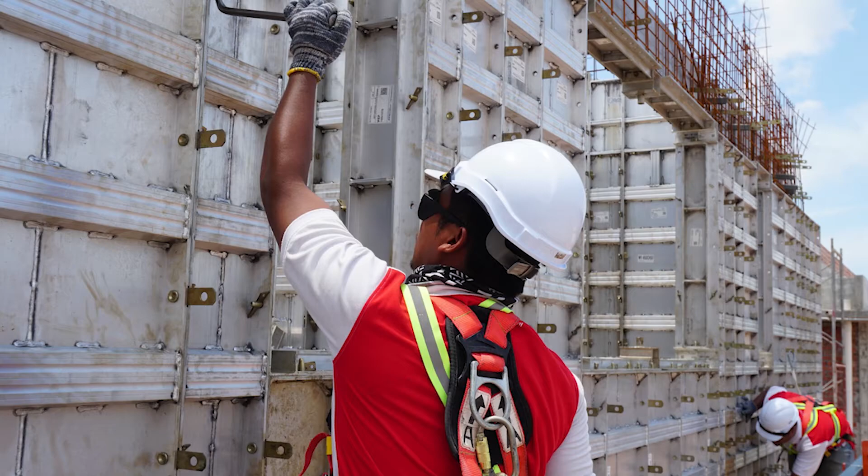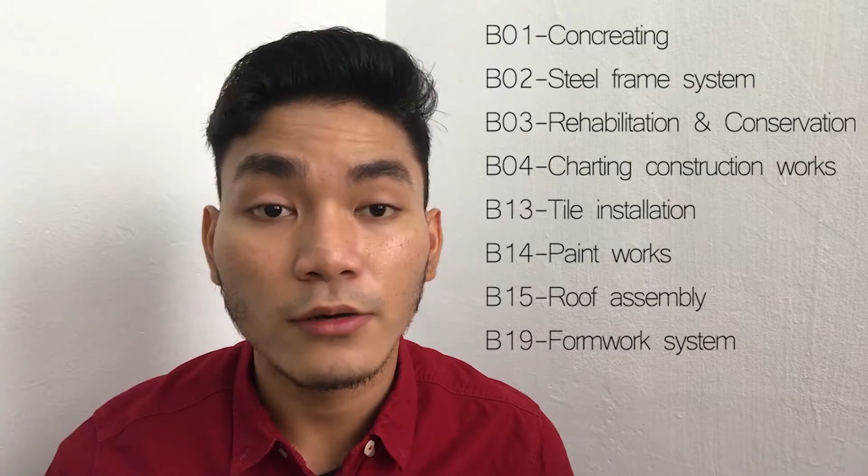Our company is Real Builders in Nurhan Bahad, based in Johor Bahru, allocated at Skudai, Johor. Our company specializes in concreting, steel frame system, carpentry construction work, tile installation, paint work, roof assembly, and formwork system. Our project is at Shah Alam, Selangor, a site location area not familiar to us.

So we shall prepare client requirements such as company registration on CIDB, Suruhanjaya Syarikat Malaysia, ISO certificate, Pusat Khidmat Kontraktor (PKK) Bumiputera status, CIDB procurement grade G7, financial registration, water authority from Syarikat Air Selangor, telecom from Telekom Malaysia, and electricity from Tenaga Nasional, all relevant to authorities' requirements for our site.

This project is in an urban area, the center of the city, so we shall consider getting permission from the local land state, which is Jabatan Bangunan Majlis Perbandaran Selangor, OSC approval to build and enter the site. Also, evaluation of the site was prepared under our insurance, Tokio Marine, and the Fire Safety Division of Malaysia and Fire Rescue Department, as part of our site evaluation form and environmental impact assessment (EIA) requirement.

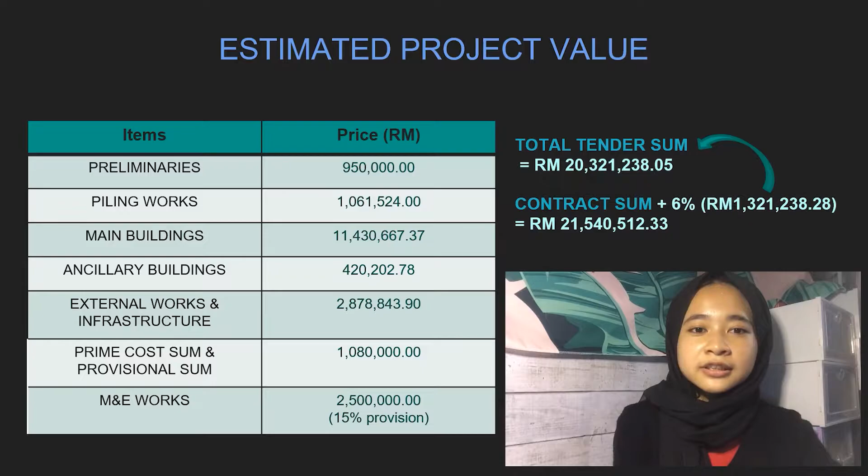Here I am, Nakia. Method statements are very important when it comes to health and safety of projects, particularly in the construction industry. Method statements are documents that detail exactly how to carry out work safely in order to ensure building health and safety.

As for our project, we detail each activity into steps and allocate types of equipment suitable to use during the particular activity, not forgetting the manpower required to carry out those activities.

As an example, for painting activity, our resources for manpower are skilled workers and general workers. The plant or machinery they need to use includes scaffolding, brush, roller, and plastic paint tray. As for the method, they need to apply painting on both external and internal necessary elements such as walls, according to the approved type and color of paint mentioned in the bill of quantity.

They need to make coating twice or more based on the requirement. Lastly, the inspection of the wall by the client or architect to obtain acceptance.

In planning resources allocation details, we make a schedule showing how many labourers and machinery are required to carry out each activity. We refer to websites to obtain information such as labor outputs, productivity rates, and production rates on the works as listed in the bill of quantities.

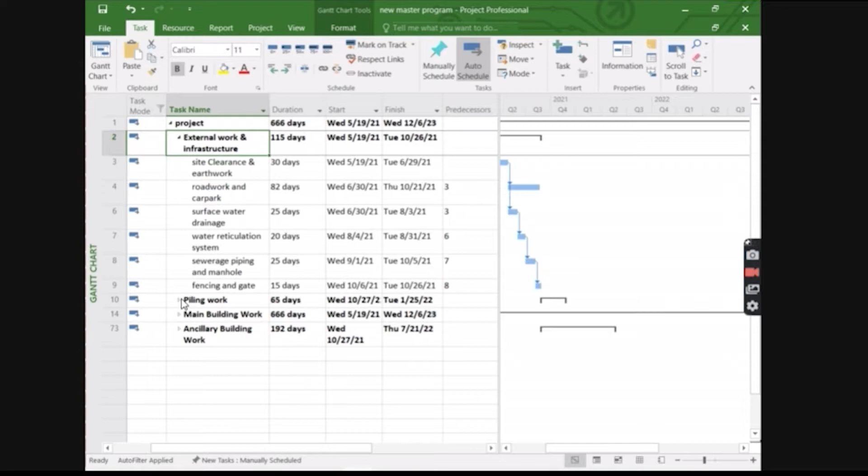In the piling work, there are 3 works that include precast concrete work, hydraulic jack-in pile, and pile testing. This piling work is to be completed in 65 days.

For the next is the main building. This main building is the main item for main work for the construction. So in main building work, WBLF is work below lowest floor. It includes the excavation, reinforcement work, formwork, concrete, waterproofing and soil treatment.

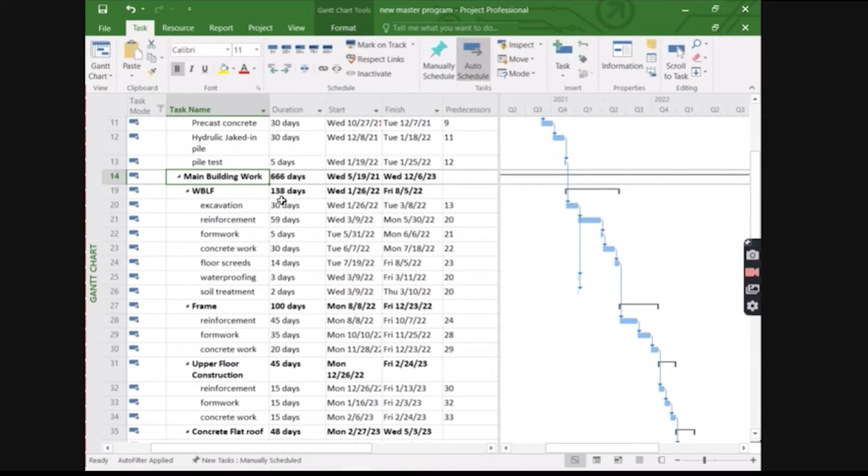So WBLF is 138 days to be complete. For the frame is 100 days to be complete. There are framework, reinforcement work, formwork and concrete work.

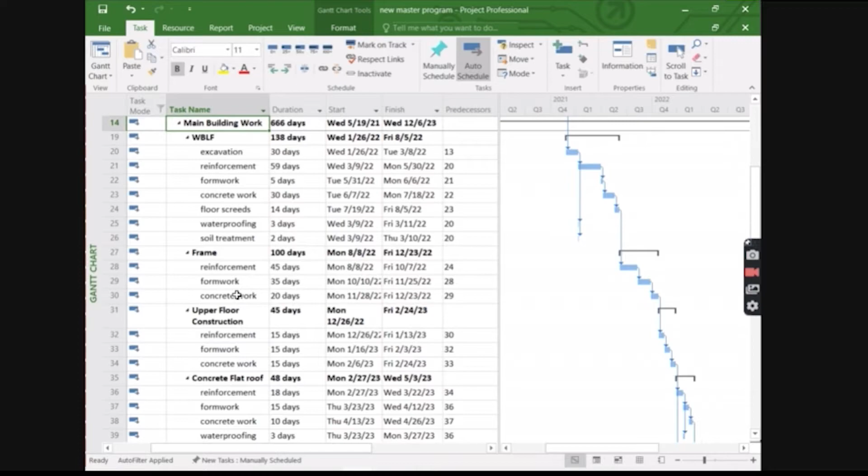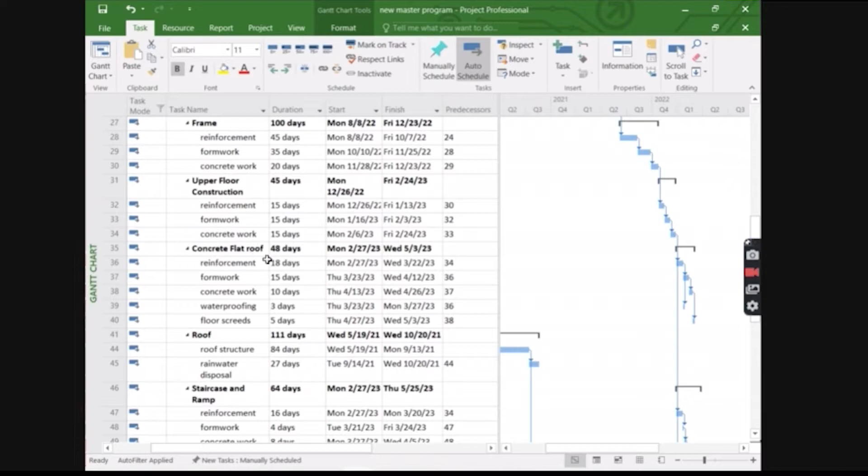So for the upper floor construction, there are 3 items, which are 45 days to be complete. Concrete flat roof is 48 days to be complete. For roof is 111 days to be complete.

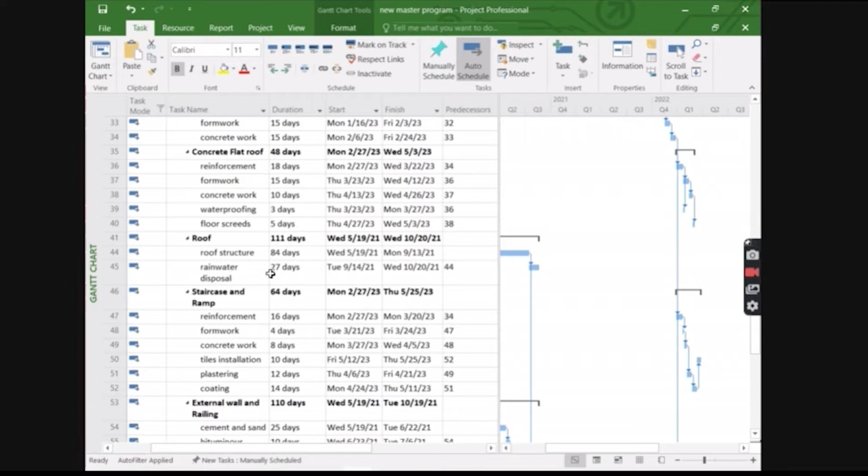This includes the roof structure and rainwater disposal. For the staircase and ramps, it is about 64 days to be complete. This includes plastering work, tiles installation work, concrete work, plaster coating, reinforcement and formwork.

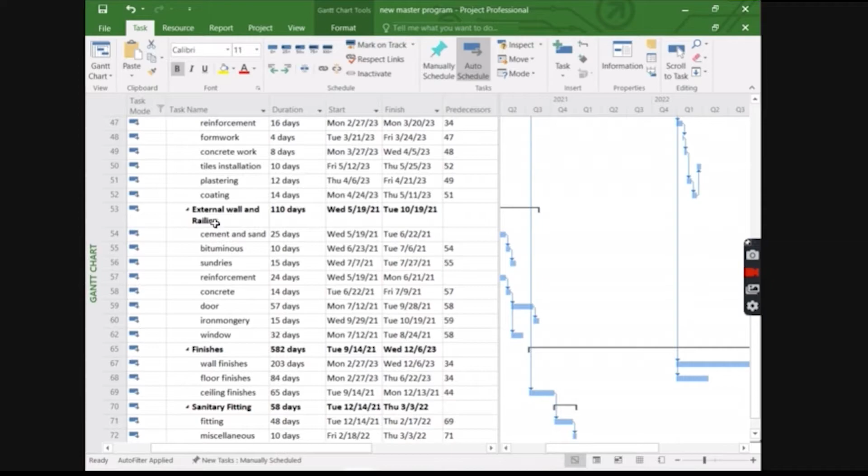For the external work, external wall and railing, this is about 110 days to be complete. The items are cement and sand, bitumens, sundries, reinforcement, concrete, door, ironmongeries and windows.

For the finishes is 582 days to be complete. This includes the wall finishes, floor finishes and ceiling finishes. Okay, so the sanitary fittings is 58 days to be complete.

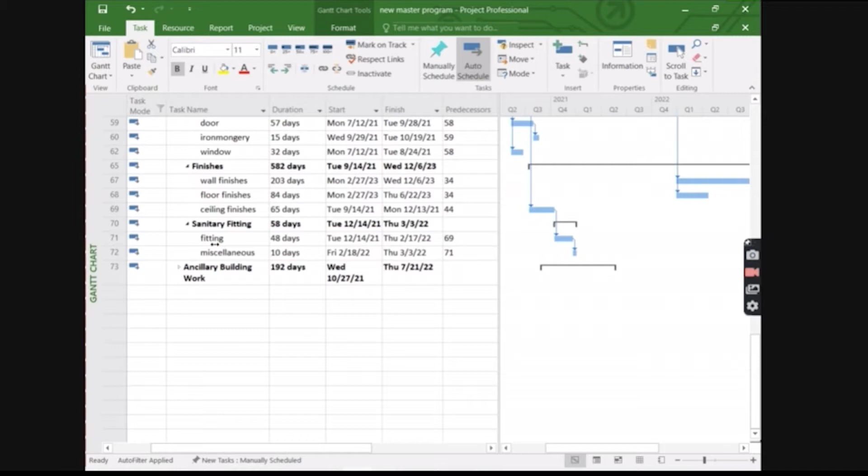Okay, and last is the ancillary work. So the ancillary work has 4 items to construct: refuse chamber, guard house, TNB substation, and wakaf. The refuse chamber is about 150 days to be complete. It includes external brick wall, door, windows, sanitary fittings, frame, roof, and work below floor level for the concrete work, reinforcement, etc.

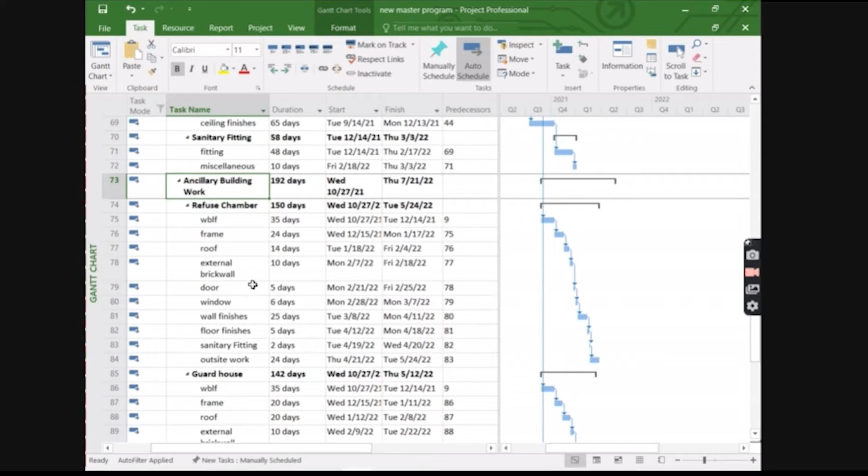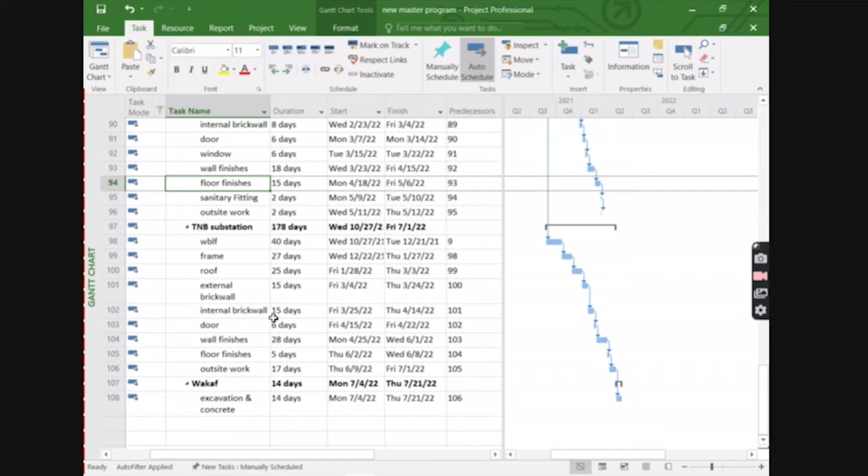For the guard house, it is 142 days. This includes the overall item to be complete in 142 days. For the TNB substation it is about 178 days to be complete. This includes the floor finishes, wall finishes, door, internal brick wall, external brick wall, frames, and roof.

And for the last is the wakaf. It is an item of excavation and concrete work for the wakaf, in 14 days to be complete.

Hi, my name is Fadisola binti Salet and I'll be explaining the part of risk assessment.

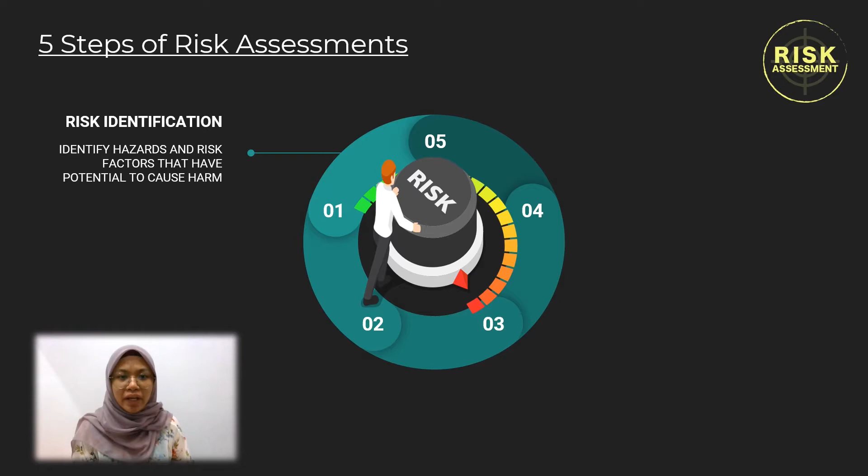There are 5 steps of risk assessment. First is risk identification, which is identifying hazard and risk factors that have potential to cause harm. Second, risk determination, which is to identify the person or property who might be affected by the risk. The third is risk analysis, to analyze the risk probability, severity, and risk level according to the risk matrix. The fourth is risk response, which is evaluating suitable response to be taken upon the risk. And the fifth is risk control, which is to determine the appropriate solution to eliminate or control the risk.

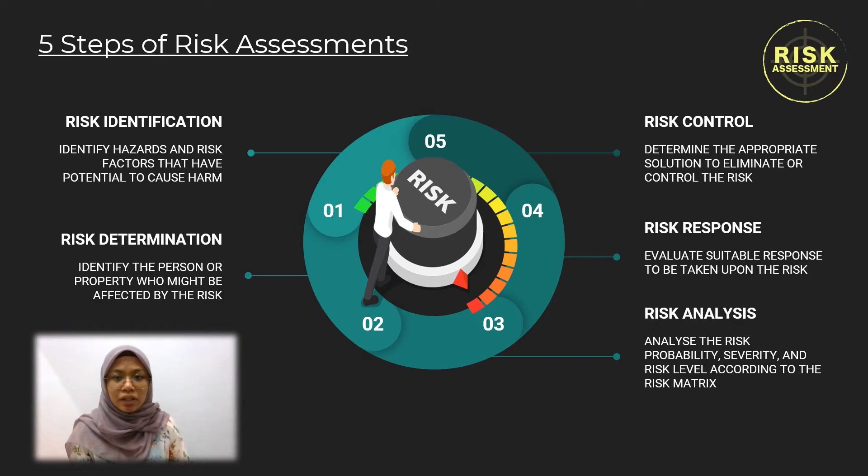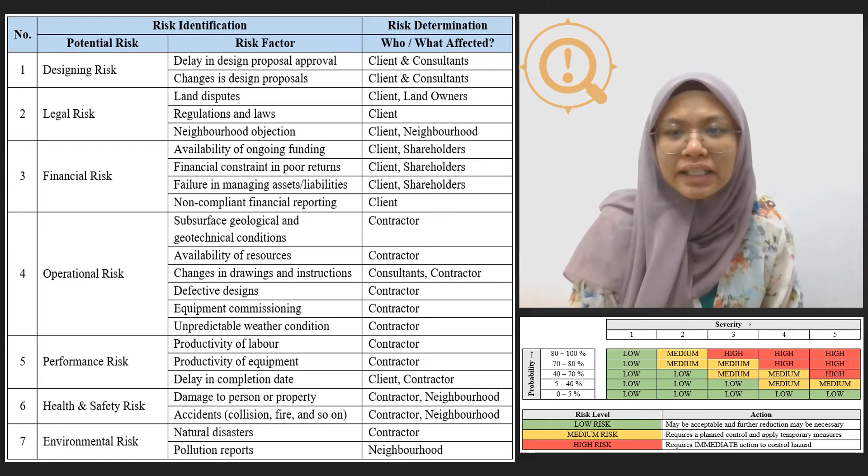For the health and safety risk, both contractor and the surrounding neighborhood are affected, whereas the environmental risk - for natural disaster, the contractor is affected, whereas for pollution reports, it affects the surrounding neighborhood. These are the risk matrix that we'll be following.

Data analysis. I will briefly explain the average risk level of each potential risk. Design risk and legal risk are both on the average risk level, as both probability and severity are 40% to 70% and 3 respectively. Financial risk is at the low average risk level, as of date there are no financial issues.

Operational risk and performance risk are on the medium average risk level, as majority of the activities are rated at severity 3 due to unforeseen circumstances that might take place, whereas the health and safety risk and environmental risk are both rated high average risk level, as both are crucial risks that might affect the construction duration the most by putting the project on hold once occurred.

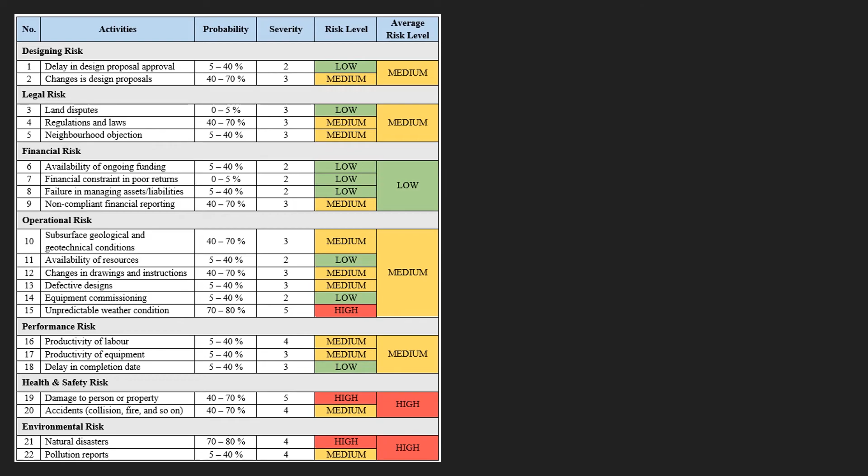Risk response and control. I will briefly explain the response and its control measures for each potential risk. Design risks are to be reduced by follow-ups and keeping track with the designing team or consultant. Legal risks are to be avoided by avoiding any disputes, maintaining comprehensive documentation, and maintaining or settling with neighborhood association.

Financial risks are to be reduced by gaining early or stable fundings, monitoring assets inflow and outflow, and avoiding any non-compliance. Operational and performance risks are to be reduced by weekly updates, follow-ups on resources, complying to quality standards, monitoring performance, and allocating sufficient labor.

Health and safety risks are to be avoided by holding fortnightly toolbox meetings and housekeepings, and also ensuring all workers are equipped with safety equipment and knowledge. Finally, environmental risks are to be reduced and avoided for natural disaster and pollution respectively. A project environmental plan is to be prepared as guidance for an emergency natural disaster, and a monthly inspection needs to be made to avoid any pollution.